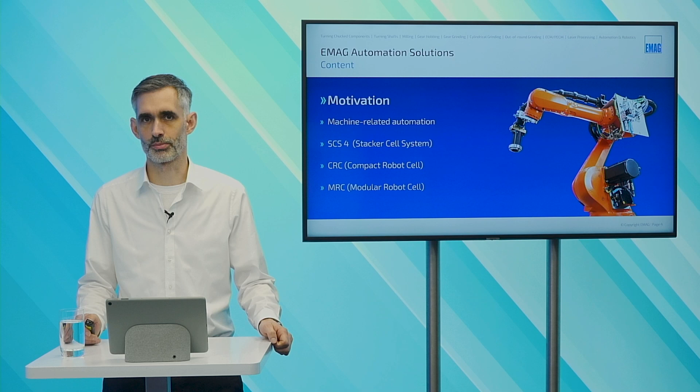There are 2 points I want to figure out from a very long list. The first one is the demographic change. We have customers telling us they are not able to run their orders because they do not have enough skilled workers and operators, and this lack of operators is estimated at 7 million skilled workers in the year 2030.

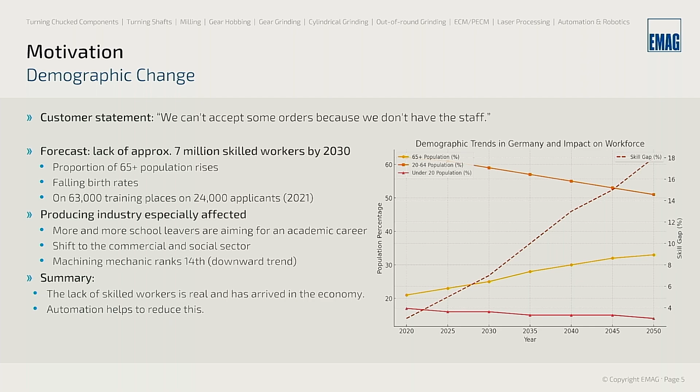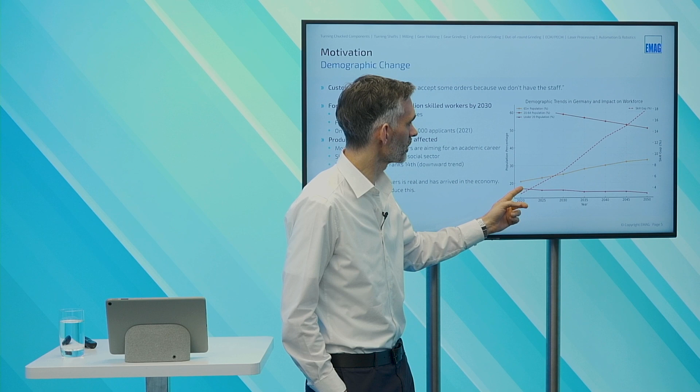You can see this very clearly on this graph. The population of persons above 65 years is increasing, while the population of 20 to 64 years is decreasing, although the job beginners with an age below 20 is decreasing as well. So we have a very strong demographic change.

2 numbers I want to figure out are the training places. We had in the year 2021, 63,000 training places and only 24,000 applicants for this. So this gap is a very huge one and shows which direction we're going.

The producing industry is especially affected by this problem because more and more school leavers are aiming for an academic career, meaning they do not go to classically trained jobs anymore. But also inside the trained jobs, we have a shift from the technical sector to the more commercial and social sector. For example, the machining mechanic, which has been in the top 5 in recent years, fell down to position 14 in the most loved jobs.

As a summary, the lack of skilled workers is reality and has arrived in the economy. With our automation solutions, we can work against this to stop it and have a solution with running machines with fewer operators. The second point is the economic pressure.

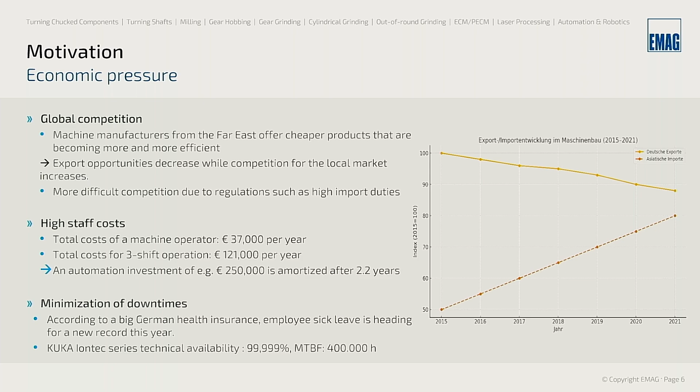Machine manufacturers from Far East often offer very cheap products, which are becoming more and more efficient. On this graph, you can see exports from Europe are decreasing, while imports to Europe from Far East are increasing. So even in the local markets, we are facing very strong competition. We need something to separate us, and this is better technology and also a broader portfolio. So we want to offer automation solutions to fight this economic pressure.

In addition, in the middle of Europe we have very high staff costs. Let's do an example. If we calculate a machine operator at 37,000 euros per year, we get around 120,000 euros working 3 shifts, including markups. If we calculate an automation solution at around 250,000 euros, this is amortized in approximately 2 years. So you can see automation also helps us get very good solutions for fighting the economic pressure from our customers.

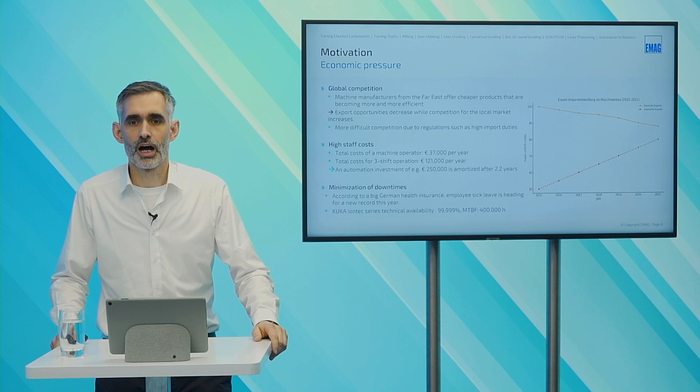In addition, with automation we can minimize downtimes. According to a big German health insurance, employees' sick leave hit a new record this year and last year. Against this, the technical availability of a KUKA robot has a mean time between failure of 400,000 hours.

So I think these figures speak enough for themselves, and that's all for this short summary of why we at EMAG want to offer you good and proper automation solutions. So I want to hand over the word back to Johannes, who will introduce our machine-related automations.

Yes, thank you, Jan, for that.

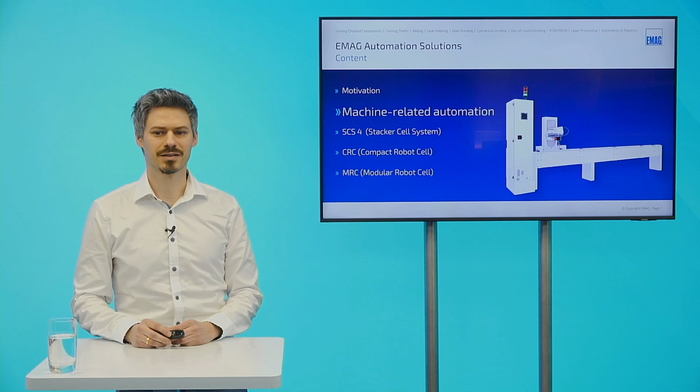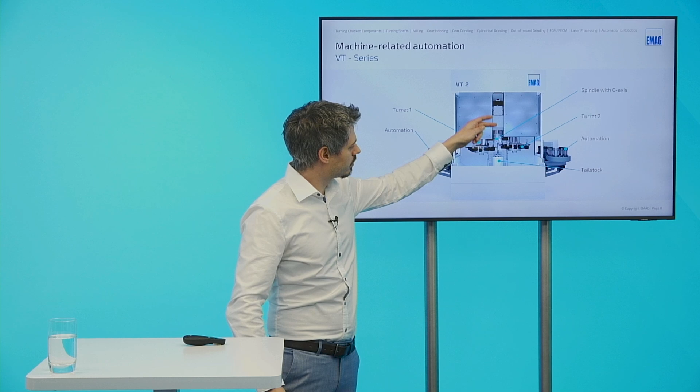As you know, our EMAG machines are very well automated. Here you can see a machine out of the VT series. This series is designed for machining shaft parts. You can see the machine has 2 turrets inside. On the top side here is the spindle, and we have the tailstock on the bottom of the machine.

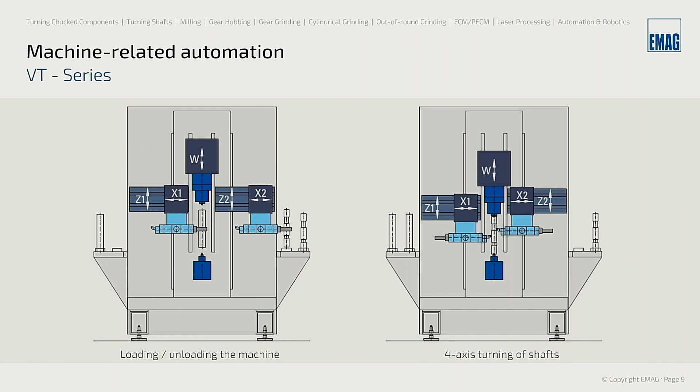Left and right side on the machine, we have an automation system. It's a shuttle or maybe a conveyor. The turrets of the machine don't just carry tools, they also carry a gripper for the parts. The turret leaves the machine in this area, grips the part from the automation, and then unloads the part directly into the spindle of the machine. If the part is finished, the second turret grips the part and unloads it to the other side.

Our VL series machines are designed a little bit differently. Here we have a turret with the tools on the bottom, and we have a spindle mounted on up to 3 axes. Also, we have an automation conveyor or shuttle on the left-hand side, and this automation has a pickup station included.

As you can see here, the spindle with the chuck can leave the working space of the machine and pick up the part directly out of the automation. Then it moves the part to the turret where the part gets machined, and after that the part can unload back to the automation of the machine again.

Here you can see a VL3 Duo machine. Duo stands for 2 spindles inside one machine, and each spindle has its own shuttle, which you can see here. To interlink these 2 shuttles, we use our track motion automation system to load the pallets onto the shuttles and also do the turnover from the OP10 to the OP20 part.

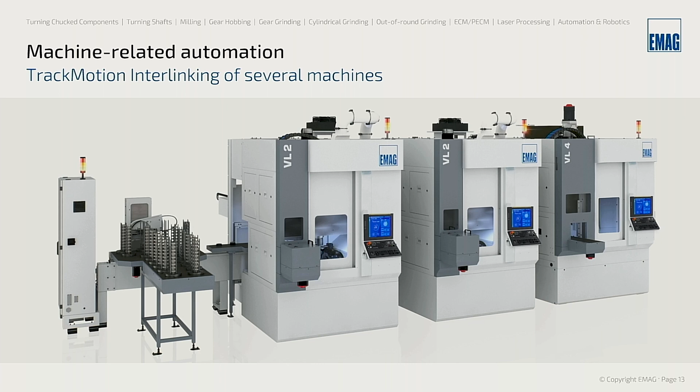With this track motion system, we are able to interlink a lot of our machines. The track motion can move through the backside of the machine. There's an opening, and it loads each of the machine shuttles. With this solution, we are able to interlink several machines and generate bigger production lines.

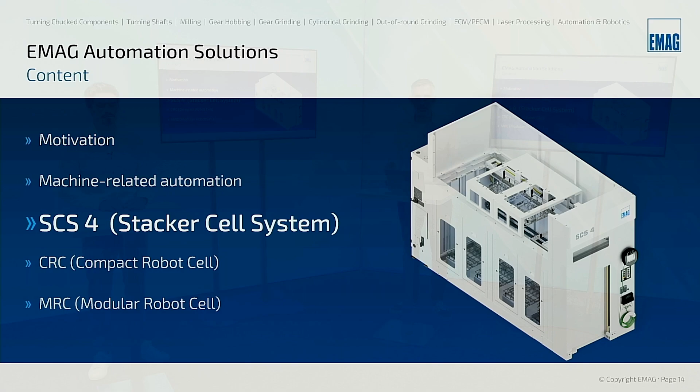Thank you, Johannes. So far about the machine-related automation. You see our machines do automate themselves by the handling they have inside, but our goal is increasing the autonomy through several automation solutions. This is what we want to introduce to you right now.

First, we want to show you our SCS4. SCS stands for Stacker Cell System, and 4 for the 4 internal slots which can be used for basket handling. This work cell is built up for basket handling because baskets are everywhere available in production, for carrying parts from one position to another on trolleys.

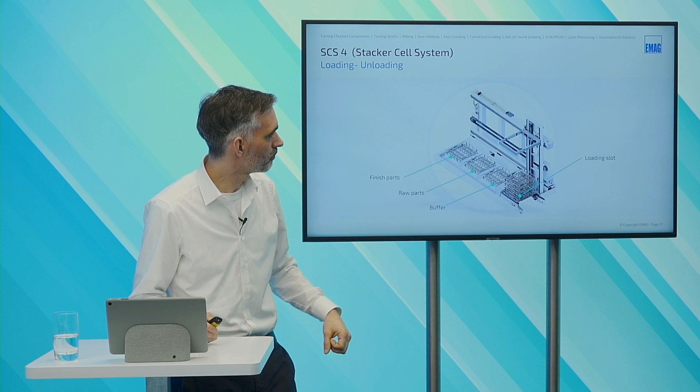The principle about this machine, like all our automation solutions, is that we install everything on a basic frame. On this frame, we have in addition this gantry system for the internal handling of the baskets, which are fed in here at the front on trolleys at floor level, then destacked and positioned to the rear positions.

We have a position for the finished parts, one for the raw parts, and a buffer where we can stack baskets that are not completely filled, until they can be placed on the finished parts stack at the very end.

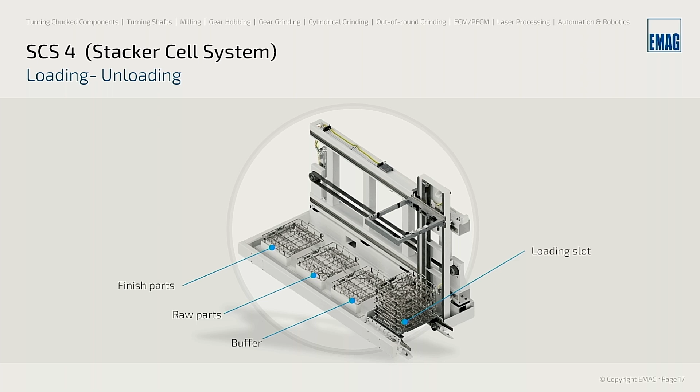To be able to change the trolleys in the front in parallel to the cycle time, we have this workspace separation. So we can close the door from the top side, so the handling can continue operating in the back side, and the operator can change the trolleys in the front.

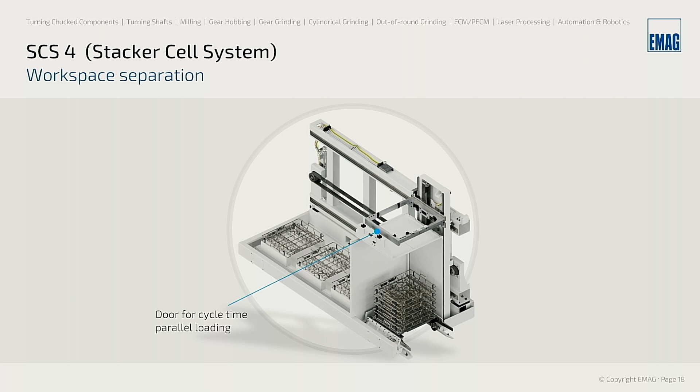On the housing, there are 2 transfer positions located. As I already mentioned, the SCS4 is for basket handling, but the workpieces inside have to be handled by a separate handling system, like a robot or gantry system. Therefore, the internal gantry places the baskets in the top position where the handling system can take the workpieces in and out.

For loading and unloading, we have 2 solutions. The simple one is a manual loading door in the front, which can be replaced by an automatic roller door. With this roller door, we are also capable of supporting AGVs, because this door can open automatically, so we do not need any operator on site.

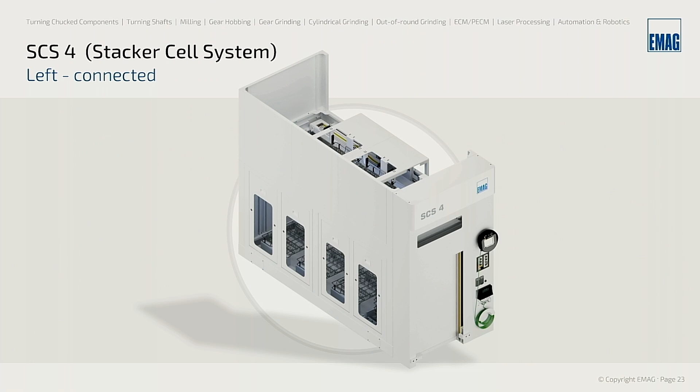We are prepared for left and right hand side connection of the external handling system, and the energy container is positioned on the back side, also fixed connected with the machine in order to avoid any rewiring at the customer side. If it's not possible to keep this energy container on the backside because of layout issues, it can be separated, but in the basic functionality it's connected to the machine.

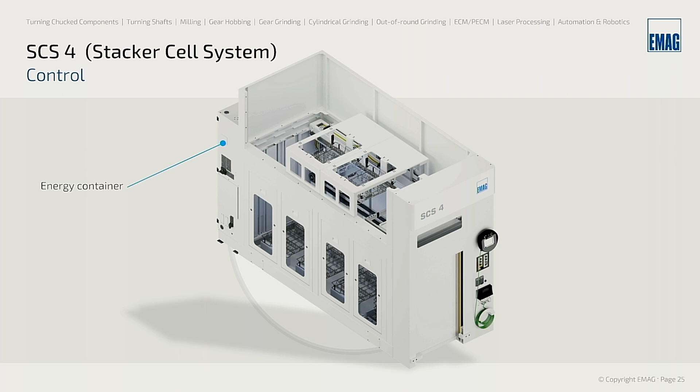So far about the principle of the SCS4. Johannes will show you how the SCS4 can be integrated into our projects. Thank you, Jan, for the introduction of the SCS4. So here we start. Here you can see an SCS4, which is loaded via a FANUC robot.

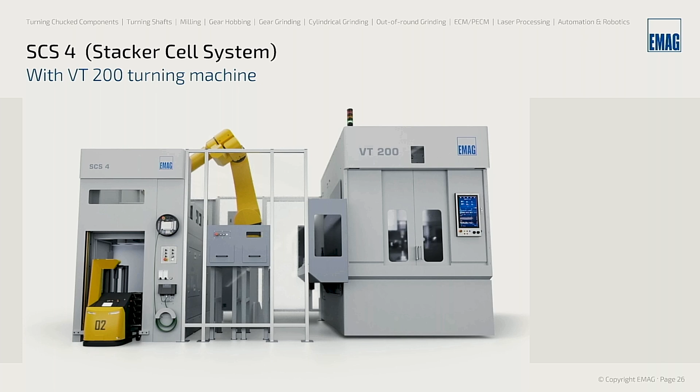This robot unloads the parts out of the transfer position and loads the part to the VT200 machine. Also, the finished parts are loaded back to the transfer position 2 of the SCS4. So we have both part situations inside one cell. Also, the stacker handling is done here via an AGV solution.

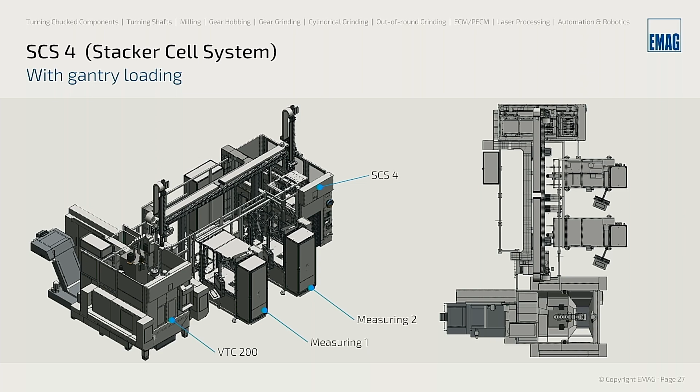This situation we had at the very end of a big production line. We had here a VTC200 machine, which did the last operation of the part. After the last operation, the part gets loaded to these 2 measuring machines via a gantry, and also this gantry unloads the finished part to the SCS4 cell.

Here we had the situation where all the parts are in one line in the basket, so it was possible to load it via a gantry. Also, the operator unloads the complete stacked finished parts out of the SCS4 and fills in empty baskets back to the SCS4.

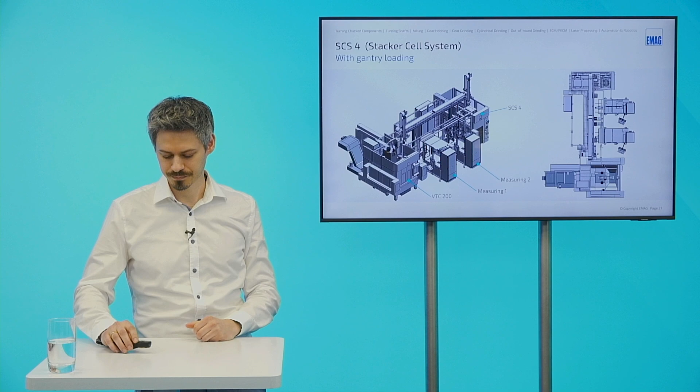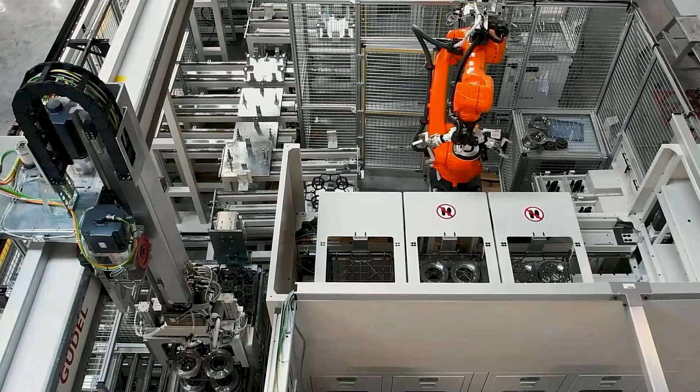Here we have a repacking cell. This cell exists out of 2 SCS4 machines. Each machine has 1 KUKA robot. And these 2 machines are interlinked with a big gantry loader.

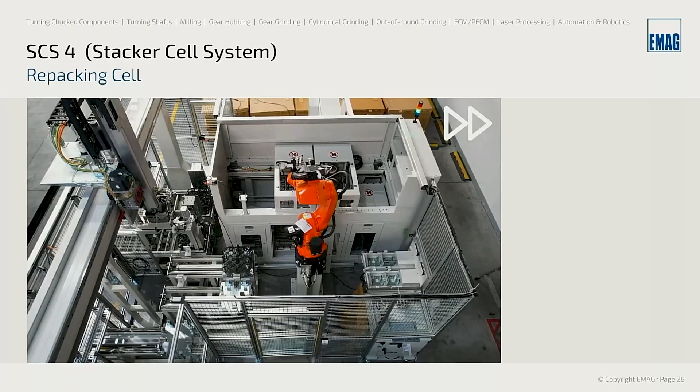The robot unloads the part out of the transport baskets and loads the parts directly to a hardening basket. The gantry stacks these hardening baskets full of parts, and then the parts get transferred to the hardening machine. After the parts are hardened, they come back to the cell again. The gantry separates the hardening baskets again to the SCS4, and the robot unloads each part back to the transport basket of the SCS4.

As a summary for the SCS4, here we have a compact basket stacking cell. The stack change is parallel to the cycle time. We have a high autonomy due to internal buffer slots, and we are very flexible in the loading and unloading strategy. The SCS4 can handle just raw parts, only finished parts, or both. We also have AGV capability with the automated roller door inside.

Thank you Johannes for this summary. We've got the first question from the audience regarding the SCS4.

We introduced the SCS4 as a basket handling system, and the question is, can the basket stacking cell also be used for workpiece carriers and blisters?

Yes, okay, thank you for the question, it's a very good question. The workpiece carriers are very well handleable with the gantry loader.

As for the blisters, they are very flexible. So if we have to handle a full blister filled with parts, then the flexibility of the blister is a little bit critical. But please send us your 3D files with the blisters, or real blisters, so we can check it and have a detailed view at the gripper of the SCS4, so we can decide if we can handle these blisters or not.

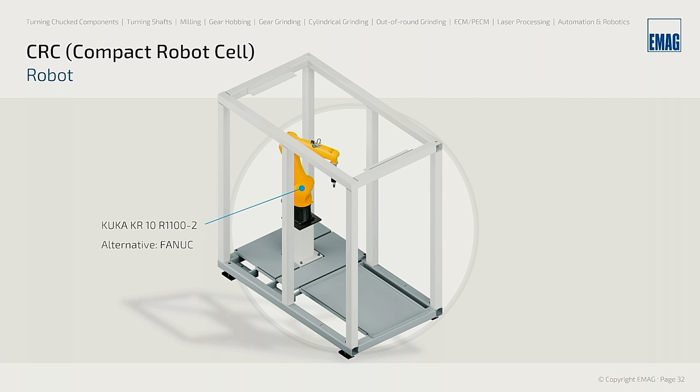Different here, we have an internal robot, so we go ahead with two different robots. We have the KUKA and also the FANUC, both available for our machines. The loading of the parts takes place in the front of the work cell.

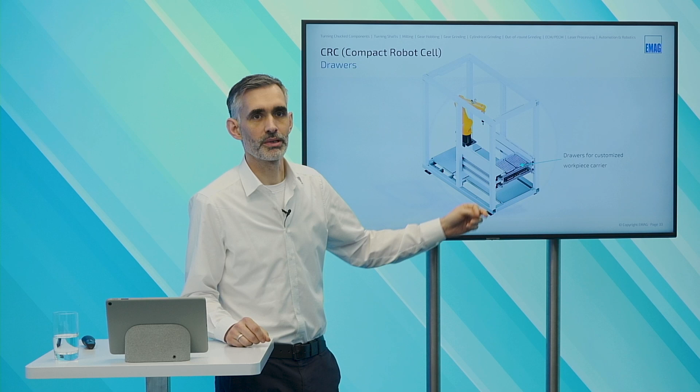So we have this drawer system in the front. Now you can see the drawers in the middle position. It can be moved out manually by the operator for a very comfortable change of the pallets on the drawer. Then it's moved manually back to the middle position, like shown now. From there it can be moved automatically inside the workspace of the robot where the part handling can take place. The amount of these drawers can be increased up to 4 layers.

Within these 4 layers, you have a much higher autonomy, but you can also use those different layers for preparing different workpieces and different batches for mixed runs of the cell. That means if you work with smaller batches, you have higher flexibility with a higher amount of layers.

Same as the SCS4, we can separate the workspace of the operator from the workspace of the robot by this door. This allows the operator to change the finished pallets on the front side without stopping the robot. This is interesting if you're facing very short cycle times, which you often have with small parts. This machine is made for small parts, so this is a very good option to increase the efficiency of this work cell.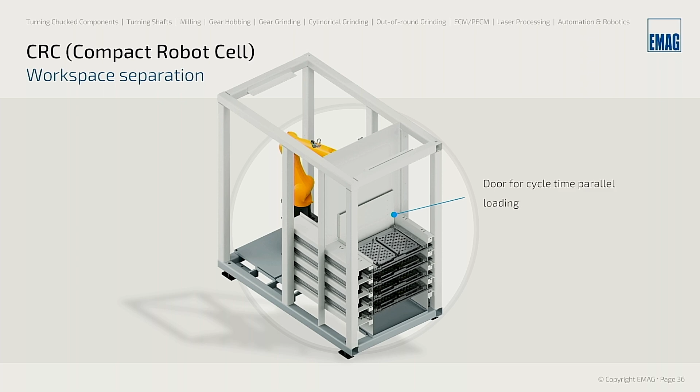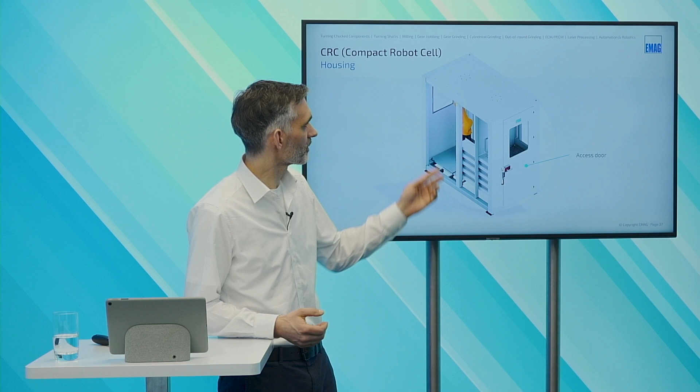The housing is designed so that we have one access door on the front side where we can exchange the pallets very easily, and a second door on the back side for entering the workspace of the robot for teaching and maintenance work. This system can also be added with a separate drawer on the side for ejecting not-okay and SPC parts.

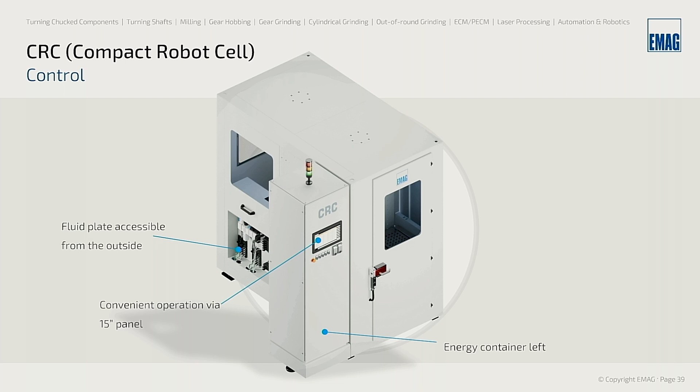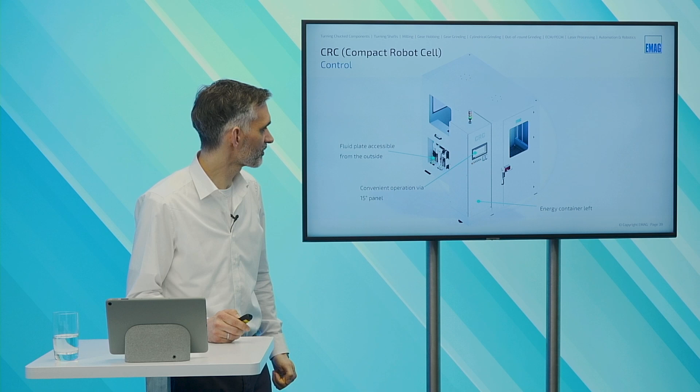Now about the control. We have this cabinet where we install all the control components inside. The robot controller is also inside here, along with our 15-inch panel for operating. We have all the valves and other components on this fluid plate on the back side, but accessible from the outside, so in case of maintenance this is very comfortable.

Regarding the layout and the machines we want to load with our CRC, we are able to switch the cabinet, positioned here on the left side, also to the right side. So we can arrange it according to the space situation at our customers.

So far in the first run about the principle again, and Johannes will show you how to use it in projects. Yes, so thank you.

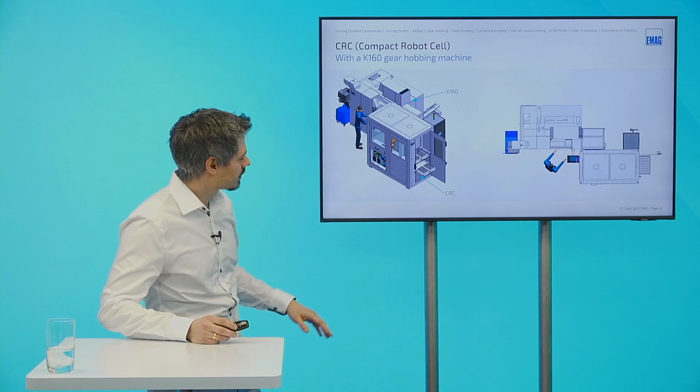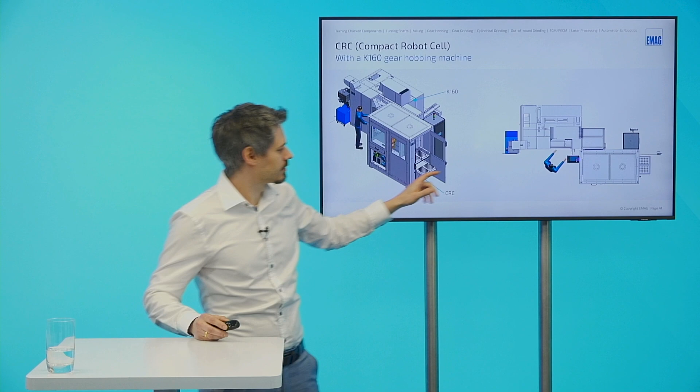Here you can see we are having a CRC just beside a K160 gear hobbing machine. The machine has its working space here and an automation space here. These two spaces are interlinked via an internal gantry loader, and our CRC enters the space of the automation area.

Here you can see a video of this situation. So the robot grabs the raw part and loads it directly to the gripper of the internal gantry. After the robot grabs the finished part and then loads it back to the drawer.

In this situation, we had very small parts, therefore we got a big amount of parts inside the CRC, and we reached a very high autonomy.

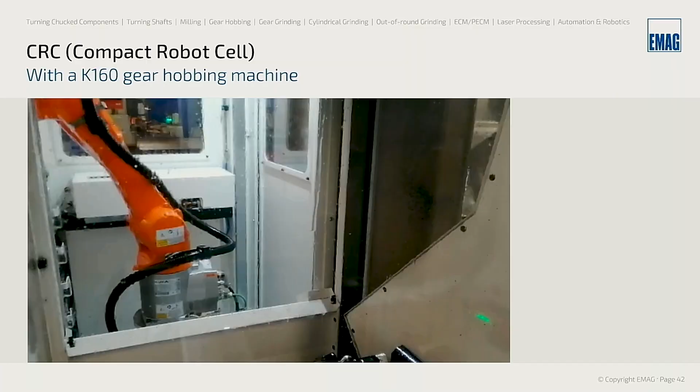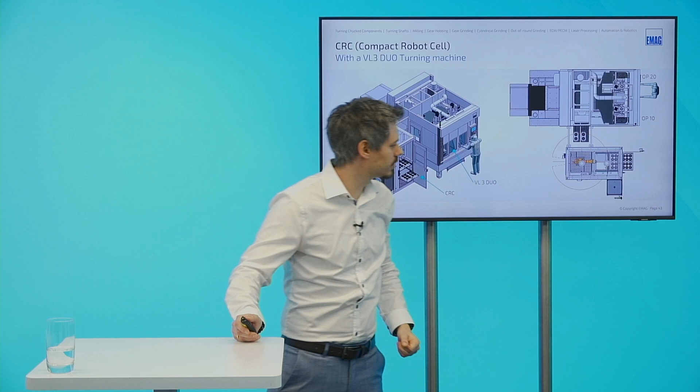In this layout, we have a CRC beside a VL3 DUO machine. The two spindles machine the OP10 and OP20 of the part, and the two shuttles transport the part outside the machine into the area of the robot of the CRC.

So the CRC unloads the raw part out of the drawer and loads it to the shuttles of the machine, makes the turnover from OP10 to OP20 shuttle, and then afterwards unloads the finished part back to the drawer of the CRC.

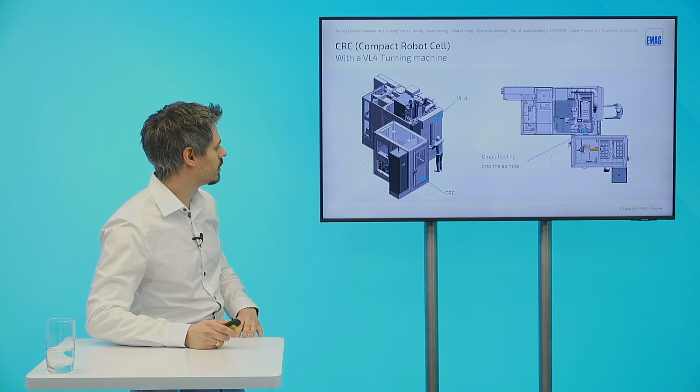In this layout, we can see a CRC just beside a VL4, and here the robot loads directly the part into the spindle of the machine via the automation space. Here we also have a video.

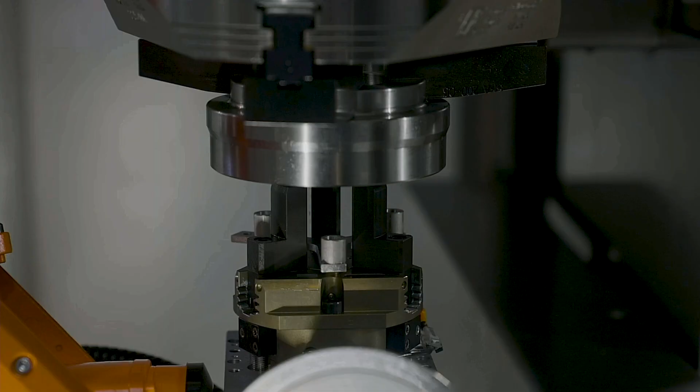So here the robot grabs the raw part and waits in the automation space of the machine. The spindle moves outside the working area, and the robot changes the part from the finished part to the raw part. We reached here a changing time of less than 4 seconds.

So if the robot loads the last finished part back to the pallet, then you can see that the drawers can change automatically to the next layer. And now the robot has the opportunity to see the next raw part layer.

Again, as a summary for the CRC, we have a very compact robot cell for workpiece carriers on a minimal footprint, convenient loading due to full extension runners, cycle time parallel pallet change, and flexible workpiece handling via an integrated industrial robot. Optionally, it's possible to mix the operations for small batch sizes.

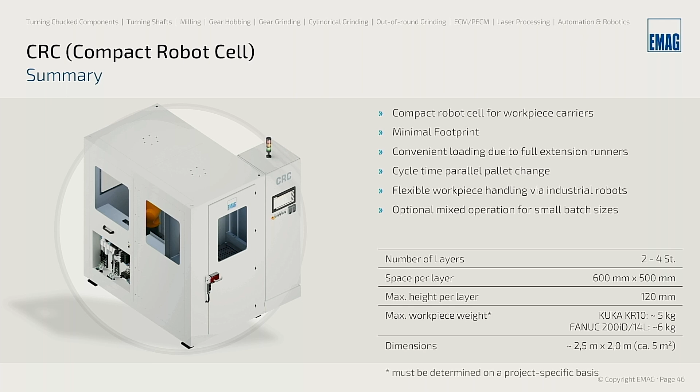So we have the opportunity to have a different part on each pallet, if that's needed for our customers. Thank you, Johannes, for showing that.

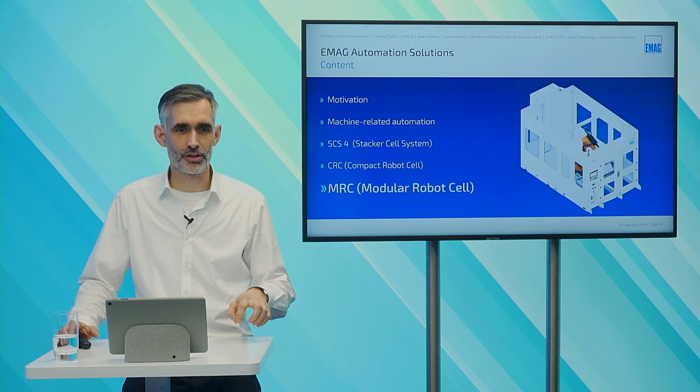After the CRC, we want to introduce to you the MRC. C stands for compact, M stands for modular. So the focus during the design phase of our MRC was flexibility.

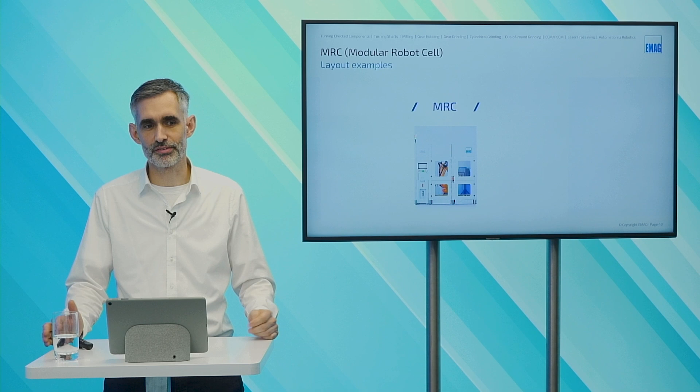Here you can see this work cell is even bigger than the CRC, but it gives us more possibilities of use than the CRC has. Nevertheless, from the design, we took care that we can transport it at once on the truck. For example, the width of the complete machine is 2.70 meters, so we can also transport it without any deinstallation.

As you know, EMAG has a lot of different technologies to provide. We do turning, we do grinding, we do gear cutting, and also laser operating. So we have a lot of different technologies.

And within this work cell, this was also one big goal of EMAG MRC. We want to interlink those different technologies from single operations to one complete manufacturing process.

Let's go a little bit more detailed into the design of the work cell. Same as the others, we have one basic frame created out of a base plate where the robot can be installed, and all of the cableways for the robot are prepared.

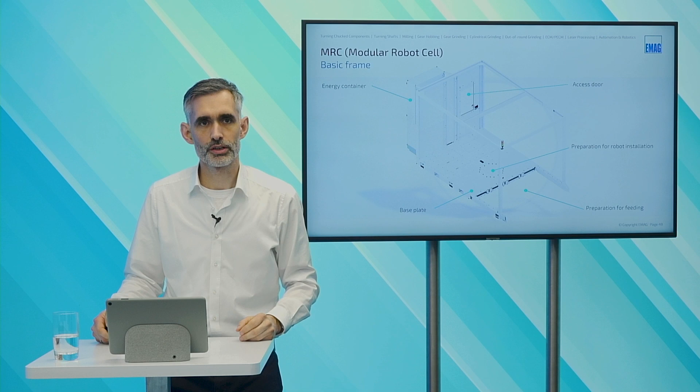The energy container on the back side and the access door on the back side are available, and on the front side we are prepared for different feeding solutions. According to layout issues and the space situation at site, we are able to move the energy container and the access door to the left and right-hand side, and flip the situation also on the back side.

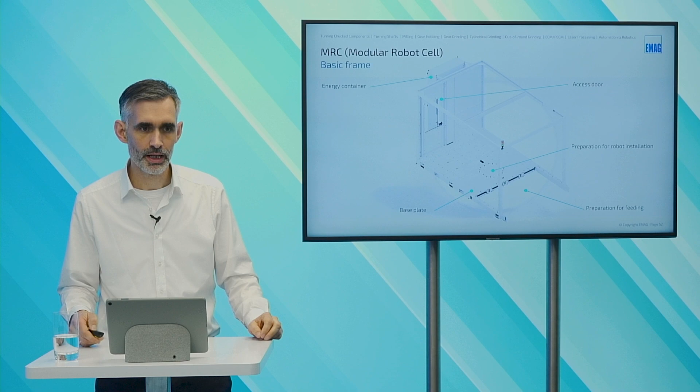As already mentioned, the workpiece handling takes place by an industrial robot as well, and we go ahead with Fanuc and KUKA. You can see we have much bigger machines in here, like the CRC.

This is for two reasons. The first is that we are facing bigger parts inside the MRC, so we have realized a project where we handled raw parts of 50 kilos. The second point is that we need a bigger working area, a bigger work range of the robot, to be able to handle bigger pallets and containers as well.

The housing of the MRC is also modular, so we can close it where no machine is available, and we can open it easily by separating several panels for connecting and interlinking the machines.

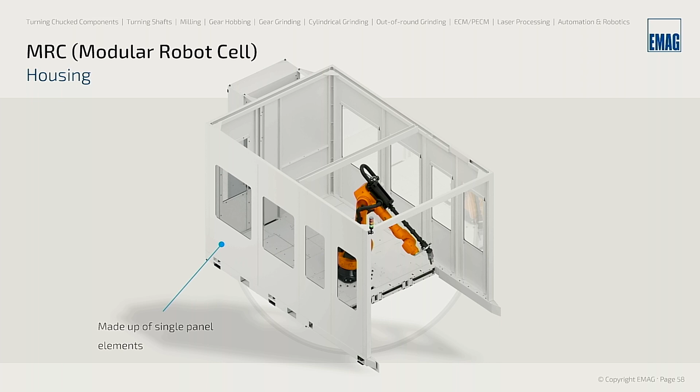These panels are designed so that the MRC can be located directly beside the machine without any influence on the accessibility of the maintenance door of the machines. This has also been a focus for us.

Regarding loading, we have different configurations. One option is two big slots with 1,100 millimeters. In Europe we know the Euro pallet with 800 millimeters, but worldwide we also face much bigger containers. If we feed in Euro pallets with top-loading AGVs, we need more space than the pallet itself, so this solution is also suitable for AGV loading.

In the next step, we have four slots, which is very comfortable for basket handling, because every single bay provides higher autonomy. With four bays, you can feed in, for example, three raw part baskets which can be shifted internally, giving you very high autonomy.

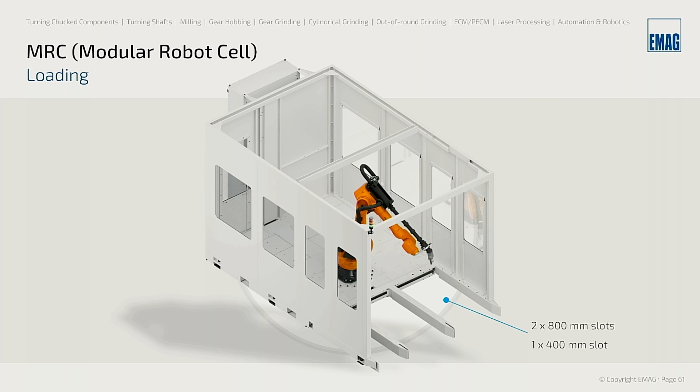The most flexible solution is a mix of two bays with 800 millimeters and one smaller bay, also 400 millimeters. For example, you can run a mixed setup: raw parts on the right-hand side, maybe on a pallet or mesh box, feed in baskets on the very left side, and stack finished parts into baskets in the middle position. This gives a very flexible solution, letting you run different parts and containers for raw and finished parts.

The HMI is located on the front side, same as the CRC. We have a 15-inch panel, which also gives us the possibility to handle camera operations easily. It's big enough for stuff like that.

Let's take a more detailed look at the single bay on the front. The right-hand side position, left-hand side position, is closed with a manual door. For example, as mentioned before, you can feed in empty baskets here. We also use this for heavy not-okay parts, which can be placed directly on a trolley and fed out so the operator doesn't have to carry it anymore.

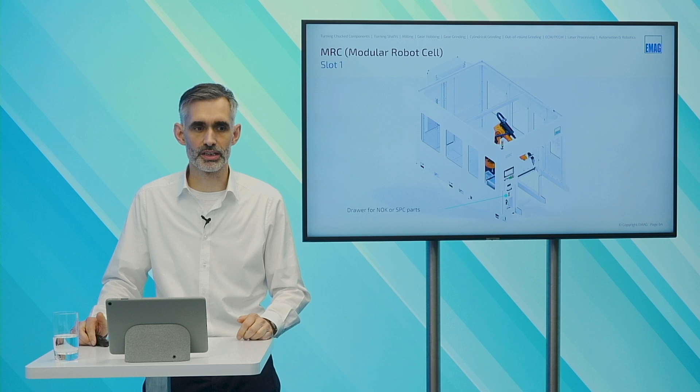Another option is placing an NOK drawer or an SPC drawer here for ejecting the NOK part and feeding in SPC parts if you do the measuring outside the work cell. The front doors can be operated manually this way.

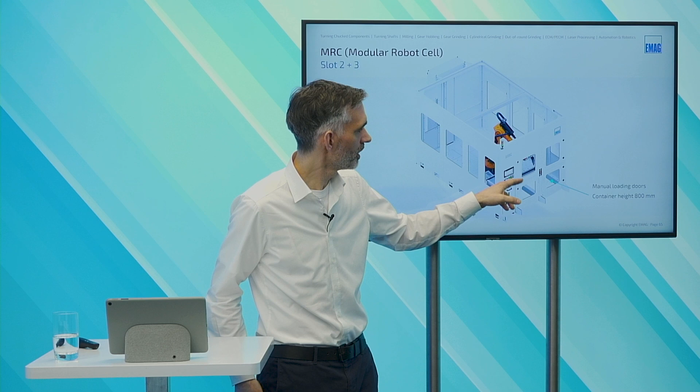You have the loading doors on the backside, on the downside, which are prepared for a container height of 800 millimeters, the standard measurement for our European mesh boxes. But you can also open the complete front with the upper doors in case of maintenance, giving very good accessibility to the work cell and the connected machines.

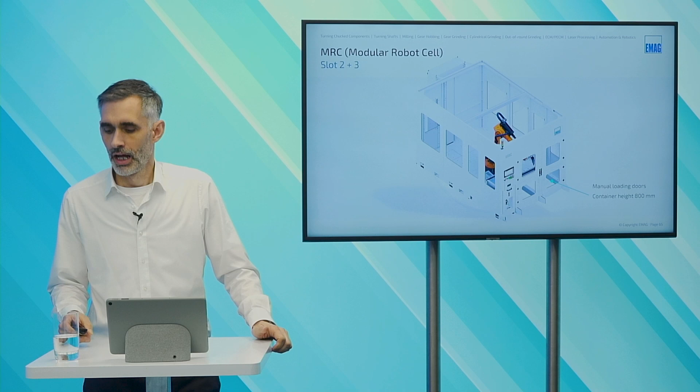As already mentioned, flexibility was our focus for the design, so we decided not to take the minimum footprint. We reserved about 1 square meter internally for function extension. That means we want to give the work cell, which is often waiting for the machines because of cycle time, the possibility to add secondary processes.

In this animation, you can see different ideas for how this space can be used: for example, a buffer like shown at the beginning, camera detection, or a topic getting more and more important, laser marking or marking of parts in general. It doesn't have to be laser marking - you can connect all measured data directly with the workpiece via a DMC code and send it to a database.

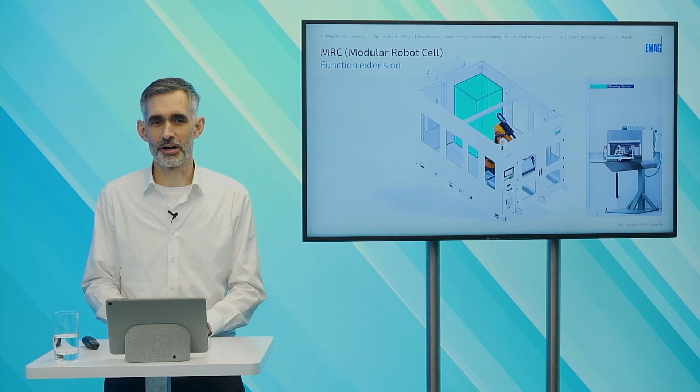Of course, measuring is a big topic. Here we show one option with an optical system, but it doesn't have to be optical - we can integrate different systems here. Cleaning the parts is also an important topic. There are many different options, and this is just a small arrangement of what can be installed. That's why we didn't go for minimum footprint - to have the flexibility to work with different additional functions. So far about the concept and principle of the EMAG MRC.

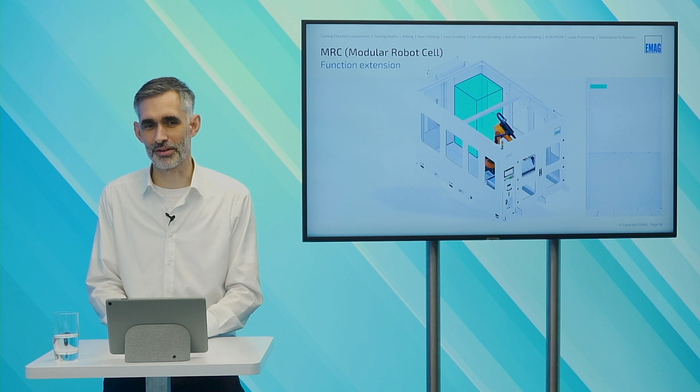And like always, Johannes will give you more information on how the EMAG MRC can be increased in functionality. Most of our customers ask if our robot cells have the capability to be loaded via an AGV system. Our answer with the EMAG MRC is yes.

So we decided to have a non-closed safety unit, with a complete open front of the EMAG MRC. But to keep the cell safe, we had to integrate some sensors. Here in the front we have the laser area scanner with two separate areas. If the operator enters the yellow area of the scanner, the robot reduces its speed, but if the operator enters the red area, the robot stops in safe stop.

On the inside of the loading area, we have two radar sensors. They detect very small movements, but if the operator or the AGV leaves that area again, the robot starts automatically again. So we don't need an operator to restart after a pallet change.

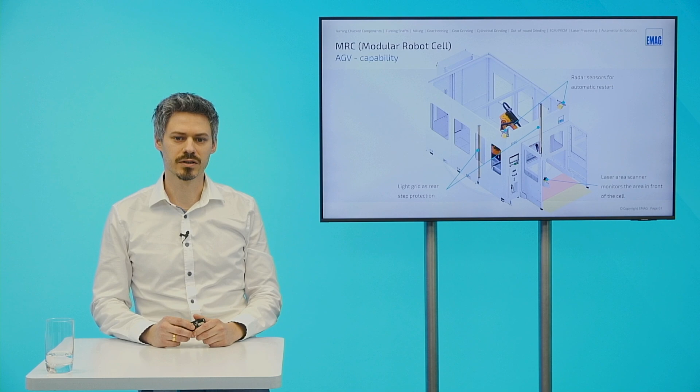The third safety sensors are our light grid just behind the loading area, and they work as rear step protection. We recognize that an operator entered the cell via the front, and then we don't start the robot cell automatically. Therefore, we need an operator to check the cell and start it again.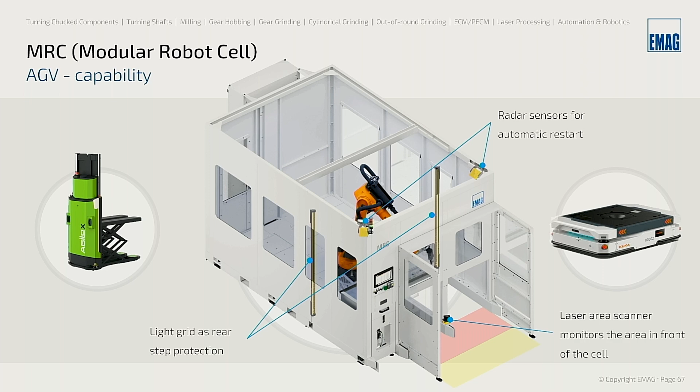With this sensor solution for the AGVs, we are able to handle all different AGV suppliers and also the different AGV systems. So the top loader AGVs are able to enter the cell if we increase our base in the front, and we are also able to load the front loader AGVs. So here we are independent.

Let's talk about how the parts are entering our cell. The first scenario is that the parts are orientated and positioned very precisely, maybe in blisters, and also stacked. After the robot unloads all the parts out of the blisters layer by layer, we also have to be able to unload the empty blister or the intermediate layer.

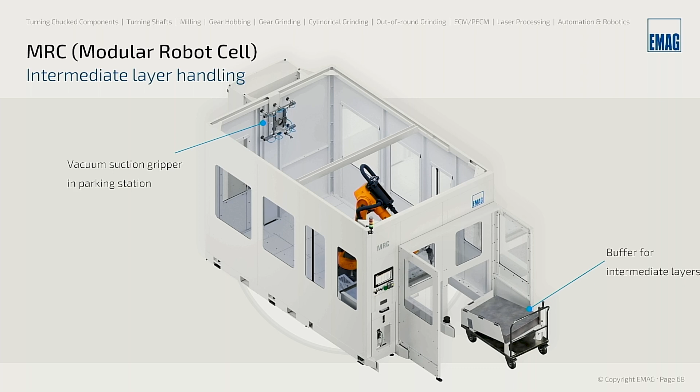In this case, we enter a vacuum suction gripper into the cell, and the robot is able to grip this suction gripper, transfer the vacuum, and with this we can shift the intermediate layers to another box or to other blisters. We are also able to store intermediate layers or blisters inside our machine, or in a small trolley if needed.

The next scenario is that the parts enter our cell, but we don't know their position. Here we have two configurations. Configuration 1 is that the camera on the top side of the machine recognizes the part and gives this information to the robot, and with that information the robot can unload the part out of the pallet.

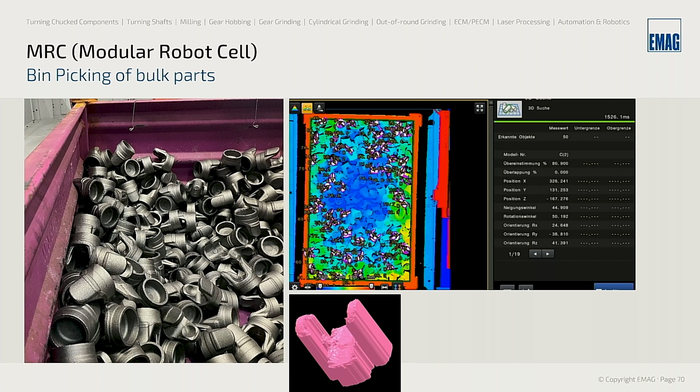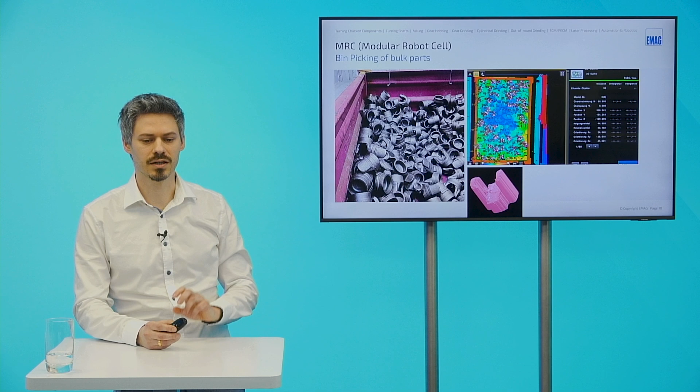Further on, the camera decides which gripper position the robot needs for unloading this part. With all this information combined, the camera makes the path planning for the robot, so it can enter the box without collision and grip the part in a proper way. With this, the robot can unload the box part by part.

Johannes, sorry for interrupting you at this point, because we got an interesting question from the audience regarding the AGV system. We've been talking about our safety concept, and the question is: how does communication with the AGV work? The communication between the work cell and the AGV system? Okay, that's a really good question.

All our automation cells have a PLC, and this PLC is the head control of our automation. This head control talks to the fleet management software. We have the interface to the fleet management just for the process signals—we need the loading and unloading signals, but we don't need the safety interface to the fleet management, because all the safety is done inside our MRC cell.

So to round it up, the PLC will talk directly to the fleet manager, so we are independent of the supplier of the fleet management. Thank you very much for answering. You're welcome. Okay, let's continue.

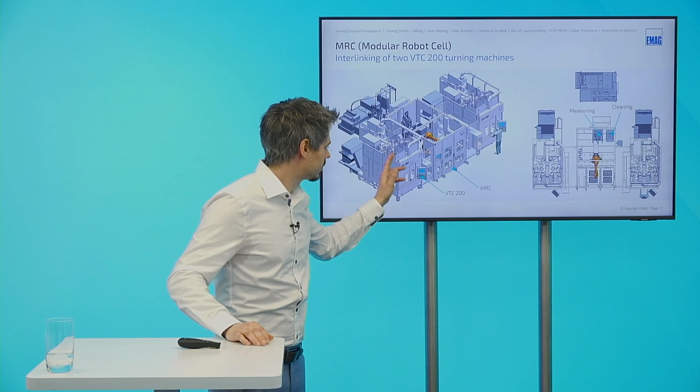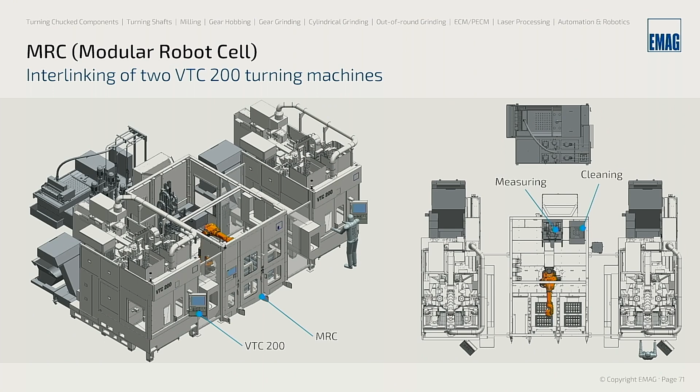Now I want to show you some layouts of how we integrate between our machines. Here you can see the MRC just between two VTC 200 machines. The left machine will be machining the OP10 and the right one the OP20 of the part. Also inside the cell we have a cleaning station and a measuring station, and the robot will do the complete handling of the parts inside this cell.

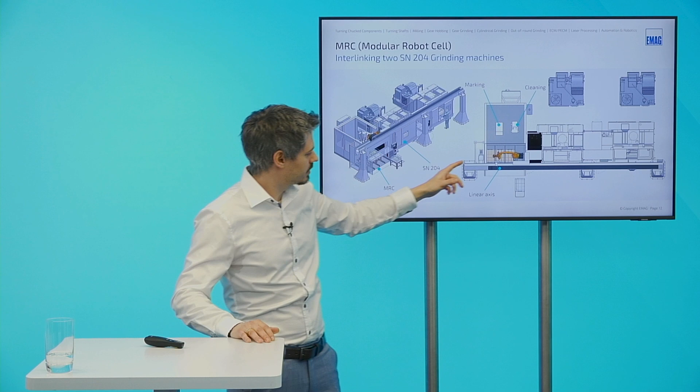Here you can see the basis is still an MRC with 4 slots in the front, and the customer loads the parts in small baskets. But here the robot isn't mounted on the base plate of the MRC, it's mounted on a linear axis, so we have the opportunity to interlink these two SN204 grinding machines. The machines can be loaded through a hatch on the top of the machine.

So the robot moves to the machine and loads through the hatch, changing over the part from the OP10 or OP20 machine. After the part is finished, the robot will load the cleaning station and the marking station, and after that unloads the part directly back to the basket of the customer.

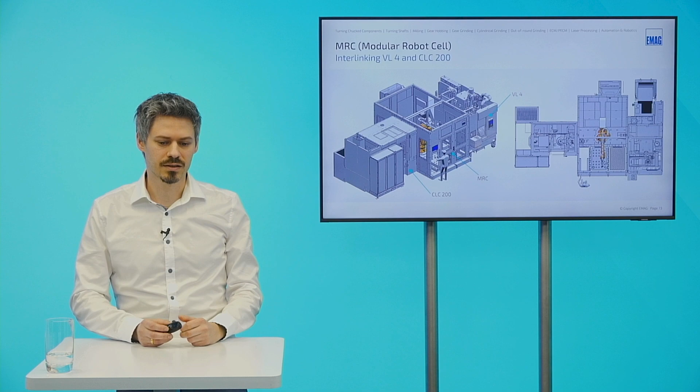Here you can see an MRC between a CLC 200 and a VL4 machine. In this layout, we are machining gear parts, and I also have a video for that machining.

The robot unloads the CLC and loads the part directly on the pallet in front of the MRC, and loads the raw part to the shuttle of the VL4. The shuttle moves to the front of the VL4 to the pickup station, and out of the pickup station the spindle directly loads the part into the working space.

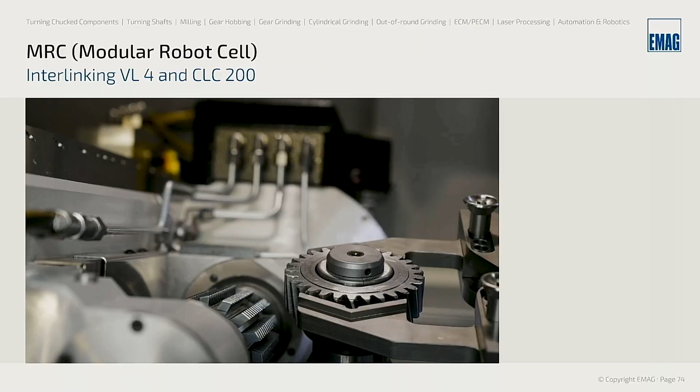Here you can see the cutting of the tooth of this gear, and here we have another internal automation solution on an EMAG machine. It's a ring loader, which will change over the part from the finished part to the next raw part.

Before we continue with the summary, we got one more question regarding bin picking, I think. The question is, how high is the degree of emptying? This sounds like it belongs to bin picking, because it's a critical aspect of bin picking. So maybe you can say some words about this. Yes, I can. It's a very good question, we often face this question. It's very hard to give an exact answer how high the degree is, because we have a lot of influences on the degree.

The boxes of the customer have a big impact, because maybe the edges of the box are very thick. Then it's possible that the camera doesn't see the part because of the shade of the edge of the box. The next topic is, if you have a very big box but small parts, they lay directly in the corner, so it's also very hard to reach them with the gripper of the robot.

So you can see we have a lot of external influences, so we can't say the exact degree of emptying. But we always offer the customer that they can send us a filled up box at Salach, and we do a test how many parts we can empty out of the box. So if you have an exact question on that, send us a filled up box and we do a test, and together we can decide how the emptying degree can increase. Maybe we can lay angled layers in the bottom of the box container, so the parts roll more to the middle of the box, then the degree of emptying is also higher.

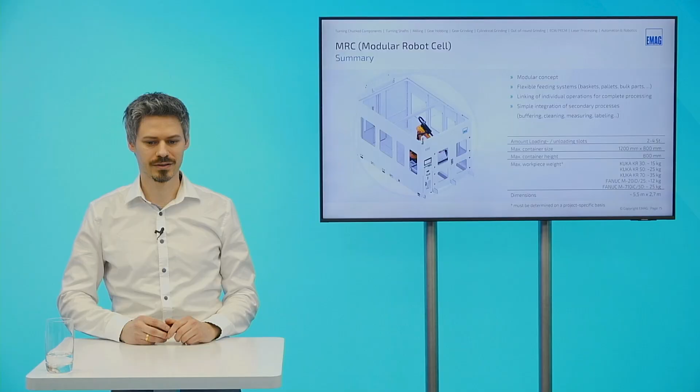Yes, let's continue. The EMAG MRC is a very modular concept. We are very flexible in the feeding system, so we can handle baskets, pallets, or even bulk parts. It's easy to interlink several operations to a complete processing line. And we have on the backside space for integration of secondary processes, like Jan already told. We can integrate a buffer, cleaning, measuring, or a labeling station.

We're coming to the end of our webinar. Thank you, Johannes, for all your explanations. In the beginning, we talked about motivation for automated solutions. We introduced the machine-related solutions by EMAG, our basket handling system the SCS4, our compact robot cell, and our modular robot cell.

As a summary, we want to hand out some good reasons for EMAG automation solutions. First, you can get all out of one hand—not only the machining, but also the workpiece handling. Our automation solution perfectly matches our machines. We are very flexible regarding the feeding systems and concepts, so we can align perfectly to your intralogistics at your production.

EMAG offers a lot of different technologies, which we can interlink from single processing to one complete processing concept. By our machine concept, our machines are all craneable and prepared for forklift transportation, so we have very short integration time on site. And last but not least, you can use our fast and worldwide acting EMAG service.